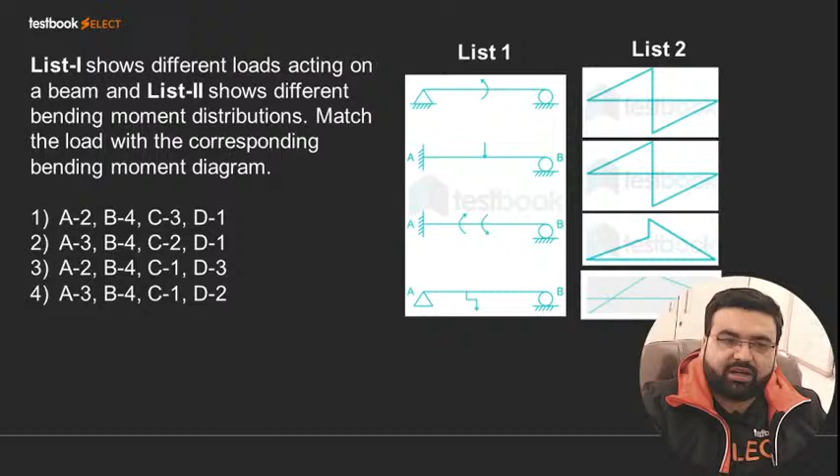Okay, this is a very easy question. You can solve this question. Okay, a simply supported beam of length L or length 2 meters. It is subjected to what? It is subjected to this much.

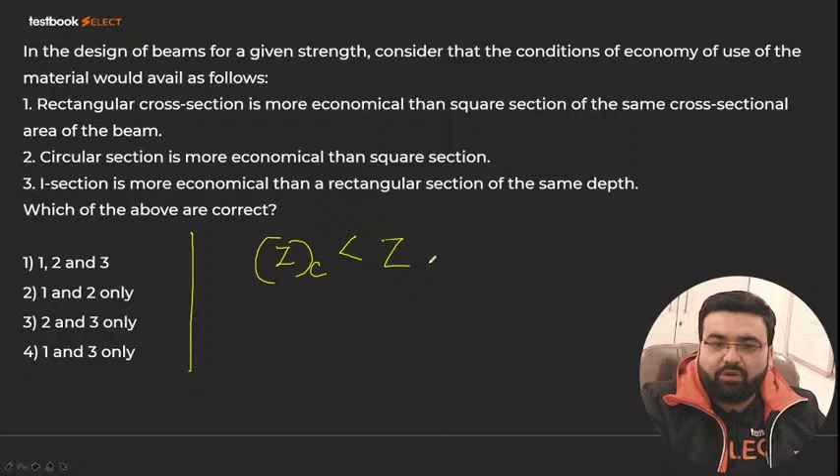So if you remember, I told you one thing when I was teaching you the strength of materials portion, that the section modulus of a circular section comes out to be less than the section modulus of the rectangular section. So from here we get this concept that the rectangular section is more economical than the circular section. So this is result number one that you should remember: a rectangular section is more economical than a circular section. Why? Because the section modulus of the rectangular section comes out to be more than that of the circular section. This is my point number one.

Point number two is that now if you look at the options given, circular section is more economical than square section. So it is completely incorrect because that contradicts what we already know. It means that the correct answer will either be 1 or 3 or both. Now look at the options. In the options we have 1, 2, 3; 1, 2; 2, 3; and 1, 3. But 2 is incorrect, right? So the correct answer will be 1 and 3. That is, option 4 will be the correct answer of this question, and it is an important question, dear students.

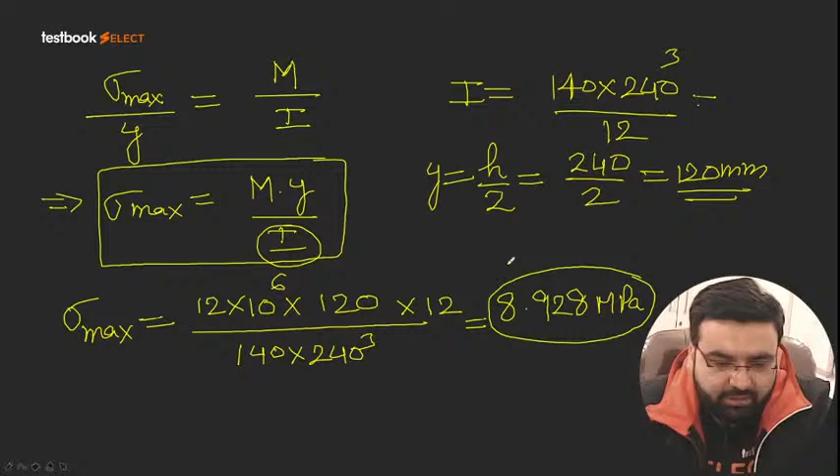8.928, right. The correct answer of this question will be 8.928 megapascals. Why megapascals? Because it was asking me to find the maximum bending stress in megapascals. So that is why I have calculated in megapascals. So very simple. Let us move directly to the next question.

Is it fine, dear students? समझ में आया आपको? Is it fine? आपको समझ में आया? Have you got it, dear students?

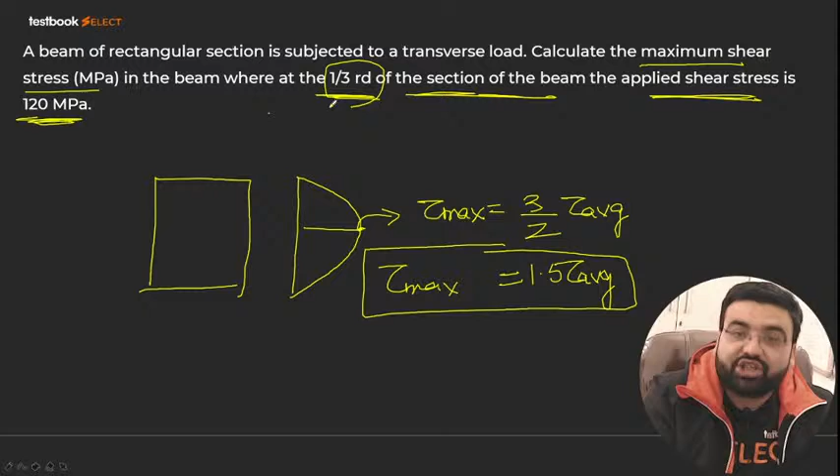और जब हमने solve किया था, the maximum shear stress was coming out to be 3/2 times tau average, or to be more precise, 1.5 times tau average. That is your tau max. Now something is given to you in the question: at 1/3 of the section of the beam the applied shear stress is 120 megapascal. With the help of that we have to find out the answer of this question.

Now to be more precise, to further give you one more hint, we know that the shear stress at any section, for example this rectangular section - if you want to calculate the shear stress at any section, that is equal to V into A into Y bar divided by I of the neutral axis, into B.

That is the formula. Now what is this A? A is the area of the strip which we are taking into consideration.

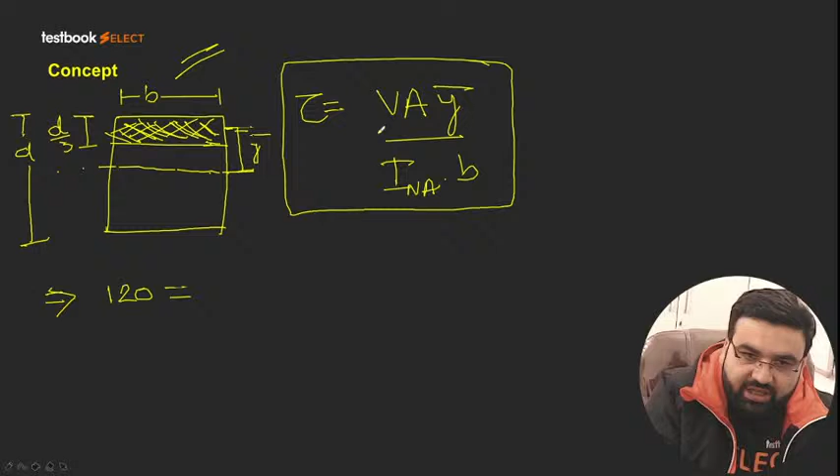So in this, the total shear stress is given as 120 megapascal. So it will be equal to V, the shear force, into area, divided by... Area will be equal to B into D by 3. So B into D by 3 multiplied by Y bar.

What is this Y bar? The distance from this to the center. Now if this is D by 3, this will also be D by 3... okay this is D by 3 and that will be D by 6. So ultimately it will be D by 6 plus D by 6, because D by 3 plus D by 6 will ultimately come out equal to D by 2, right?

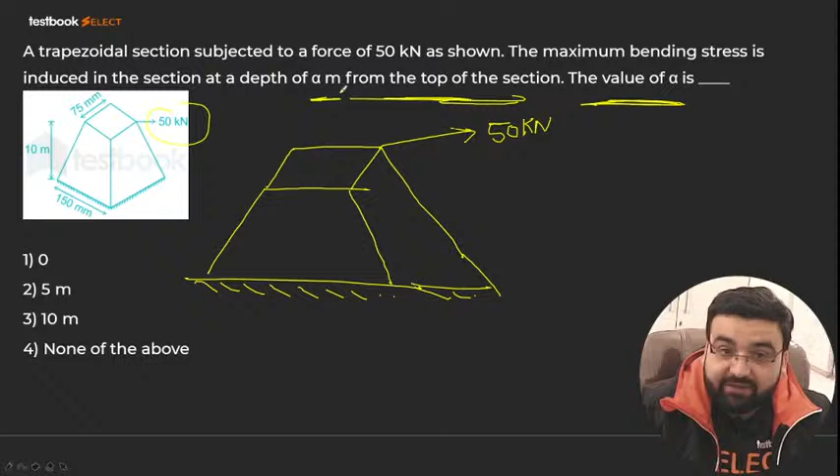So what we have to find is that the maximum bending stress is induced in the section at a depth of alpha meter from the top of the section. What is the value of this alpha?

Try to give the answer to this question. This question is a little bit typical, you'll have to think a bit for this question, but your answer will come. If you think even a little, your answer will come in this.

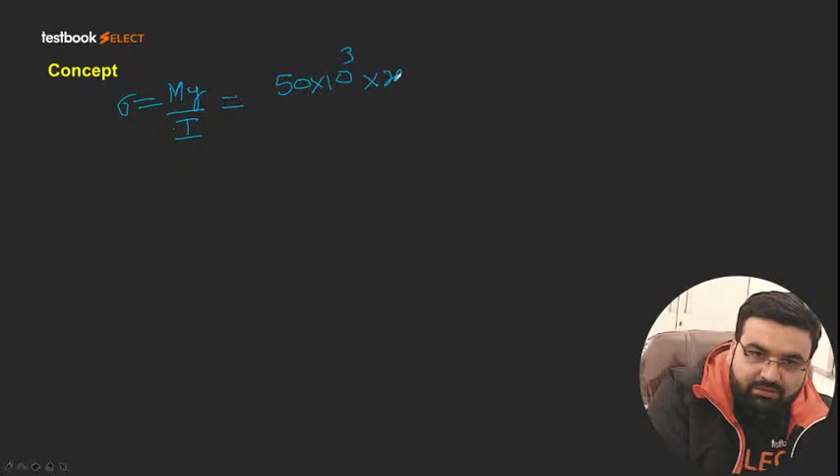And multiplied by y. Now y will be what? Let's see what y is for us. So what will y be for me? The distance from the topmost fiber. So the topmost fiber, how much will it be for me? This will be 7.5. Sorry, this will be 7.5x.

Sorry, this will be 7.5x. This will be 7.5x. 75 plus 7.5x.

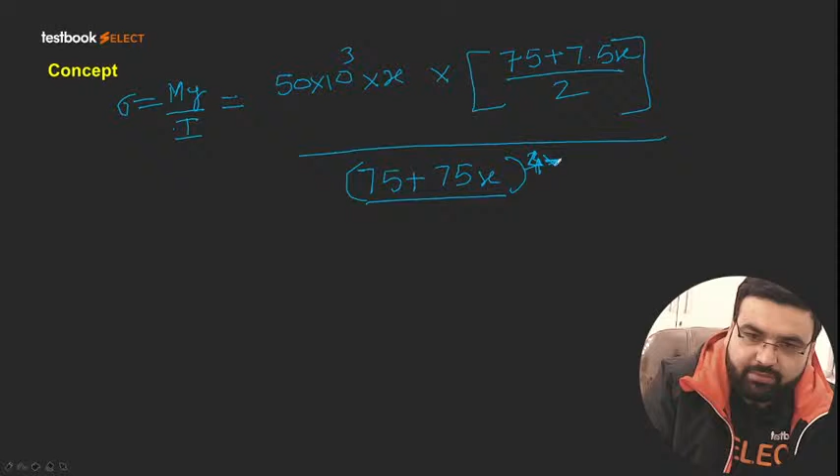ओके, सो ये आपका हो जाएगा 75 plus 7.5x, okay, and divided by what? Divided by 2 and divided by I. Now what is this I? That is your BD cube by 12. Ultimately that is your 75 plus 7.5 into x divided by B and d cube, and it will be 4 ultimately, because b and d are equal, right? Ultimately it will be equal to 4 divided by 12. So if you further solve it, dear students, I am directly writing the answer.

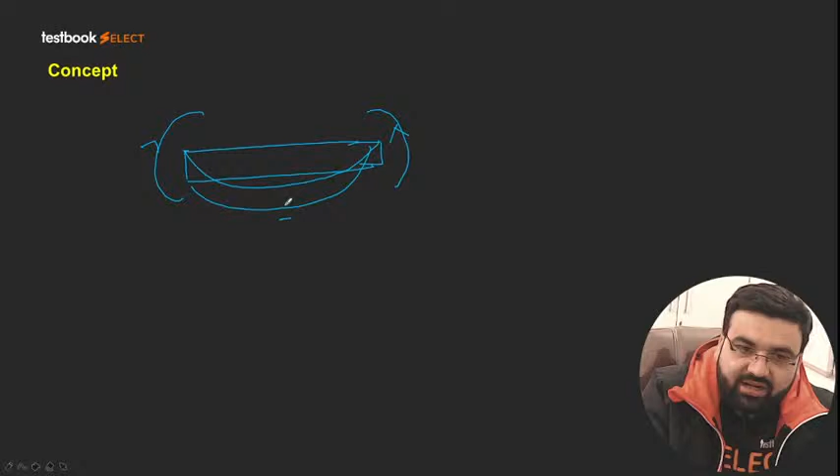Ultimately you will be getting this structure. So here we have tension at the bottom and compression at the top. This structure is called a sagging structure because ये आपका sag में convert हो गया, right? If you have this type of moment acting, ये क्या होगा आपका? Like this. Just wait a second. So here at the top we will have tension, at the bottom we will have compression.

Okay, I'm not feeling well for the past 2-3 days, so that is why I'm coughing a lot.

So T and C. Now the question is, the cross section of a cantilever beam is subjected to an end couple of 40 kilonewton meter. The ratio of the maximum tensile stress to the maximum compressive stress will be what? That is what we have to find.

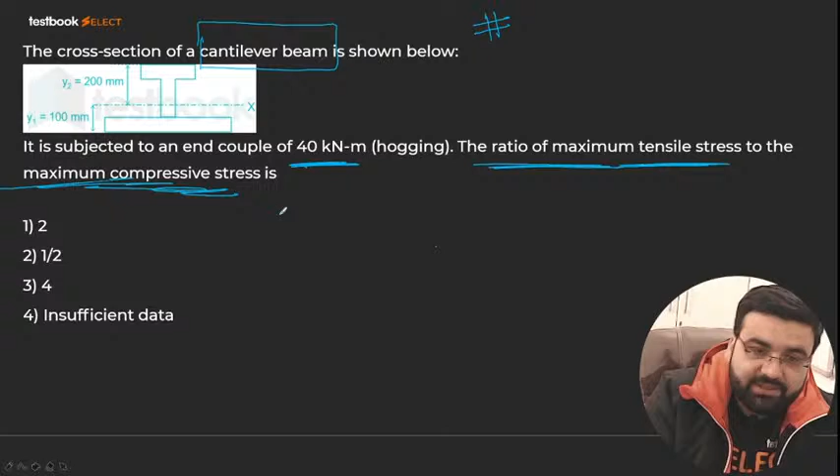Just apply directly the bending stress formula, that is sigma by y equals M by I equals E by R. The geometric property is not needed, so I will not be using this property. I will be only using sigma by y is equal to M by I. Now a hogging moment is acting, so the moment is constant.

If you take the ratio, the moment will get cancelled out. And the value of I will also be the same, because the moment of inertia about the neutral axis is not going to change. Only the value of y is going to change. So I will say sigma compression divided by sigma tension, or let me write like this, because in a hogging moment we have tension at the top.

The question is asking the ratio of maximum tensile stress to compressive stress. So sigma T divided by sigma C will be equal to what? Tension will be here at the top, and at the bottom we will have compression. So what is the distance of the top? That is 2. So 2 is the distance from the top.

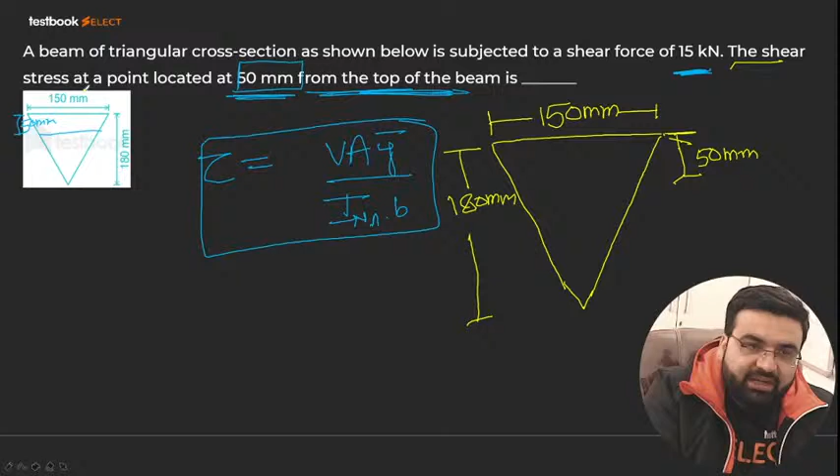The shear stress at a point located at 50 mm from the top of the beam is what? So you have to find the shear stress at this point or at this section. You have to find the shear stress.

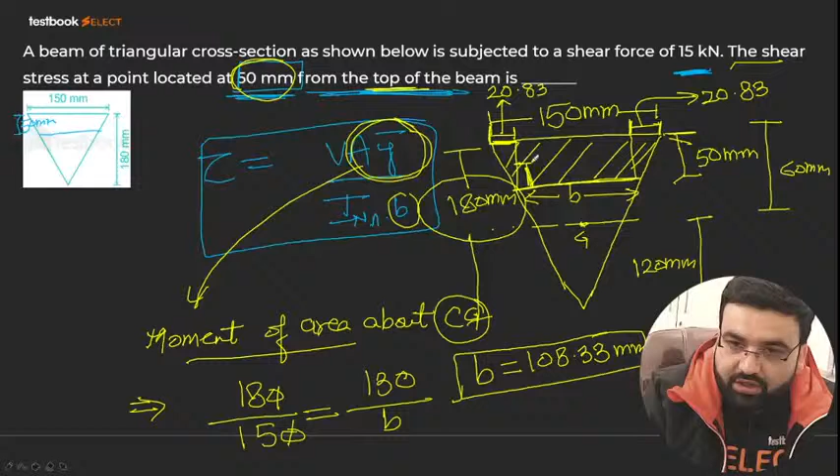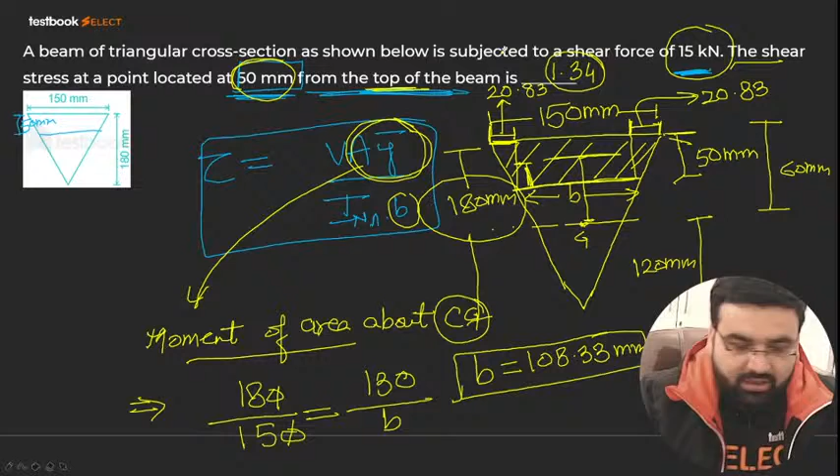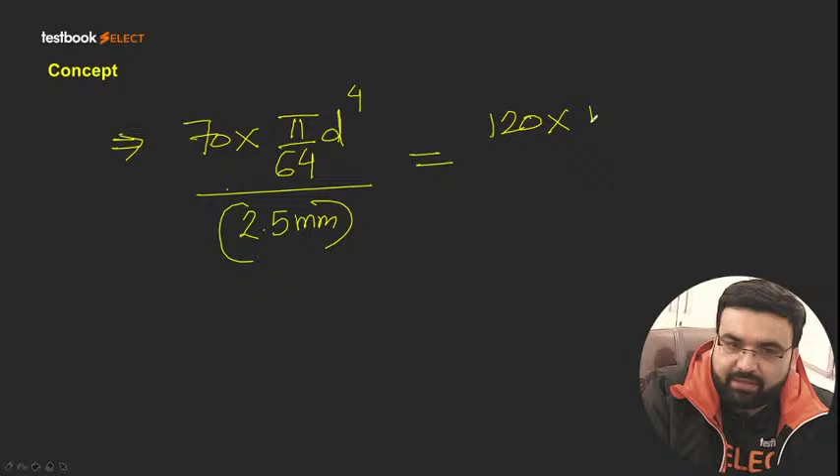120, again multiplied by pi divided by 64 into d copper raised to the power 4. This is your d aluminium raised to the power 4 divided by, now I have to find the radius, right? I have to find the radius of 2 mm. So this is also given as 2 mm. This is my 2 mm.

Now what do I have to find? I have to find what? I have to find it is bent into a circular ring, or if the same ring, the radius of the resulting ring, okay? The radius, okay? And an unspecified pure bending moment is used to bend an aluminium rod of radius 2.5.

Okay, that is the radius of the ring given, okay? So that is your 2 mm that is given here, right? That is your 2 mm given here. So there's a little mistake here, little mistake is here. There is a little mistake here.

So that is your 64 into R that I have to find, and here it was what? It was equal to, so this was equal to, if radius was 2.5 mm, diameter will be equal to 5. So diameter is equal to 5 here. The diameter is equal to 5 here, 5 raised to the power whole 4 divided by 64, and it will be equal to what? 2 mm is the ring. Now this is the final solution. So pi by 64 gets cancelled out from here and here, okay?

And this is what? The diameter of the copper ring is what? The diameter of the copper ring is, radius is 2 mm, so diameter will be 4 mm. So here the diameter is 4 mm. Let me also write down the diameter of this also, that is your 4 mm. So 4 mm is the diameter, 4 raised to power 4, okay? Now that will be the ultimate.

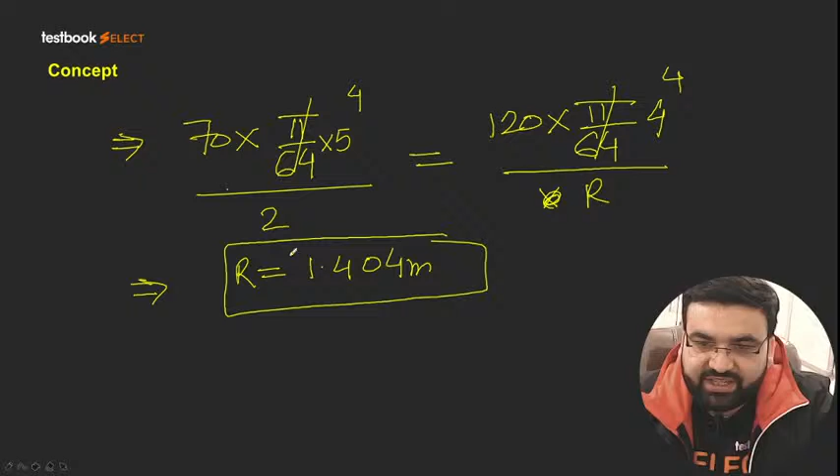So R will be equal to what? R will be equal to, if you solve it, let me try to solve it, R. So R will be equal to 120 into 4 raised to the power 4 divided by 70 and divided by 5 raised to the power 4 and multiplied by 2. It ultimately comes out to be 1.41, nearly 1.41, nearly 1, not even 1.41, 1.40, nearly 1.404 meters, nearly 1.404 meters. That is what it is coming out to be, 1.404. Yes, Dev Singh, 1.404 is the correct answer which we are getting, okay?

1.404. What is the correct option? Option 2 is the correct answer of this question. Very good, everyone, very good, very good.

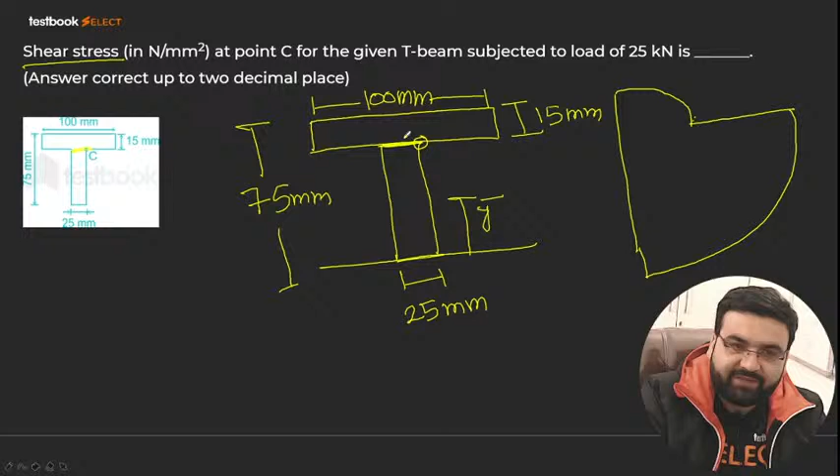25 into y bar will be equal to 25 into 75 minus 15 with 60, 25 into 60 into 30 plus 100 into 15, this will be 7.5, plus 30, plus 60, will be equal to 67.5.

So yes, it will be equal to 67.5. So 100 into 15 into 67.5 plus 100 into 15 into 67.5 divided by the total area.

So ultimately what will your y bar come out to be? It will come out to be nearly, okay this 0 will get cancelled out, and y bar comes out to be 48.75. Y bar is coming out to be 48.75 mm from the bottom. That is your y bar, which is coming out to be 48.75.

Let me also mark the y bar in this figure. So y bar is coming out to be what? It is coming out to be 48.75 mm. This y bar value has come out to be 48.75.

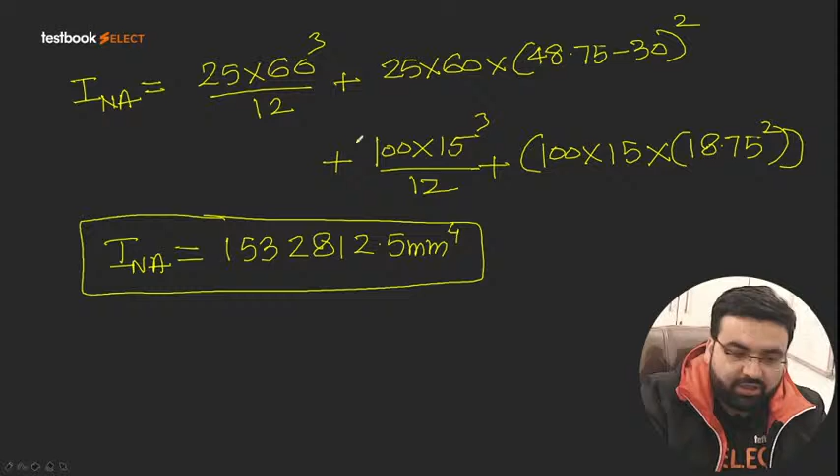Now what is this B here? What is B at this portion? 25 mm is the B at this portion because ultimately I need to find the maximum.

Into 25. If you solve it, dear students, your answer will be: 25 into 15 into 18.75, with zeros cancelling out, into 10 to the power 6, divided by 153.28, divided by 25. Dear students, my answer is coming out to be 18.35 Newton per mm square. That is the shear stress at this section.

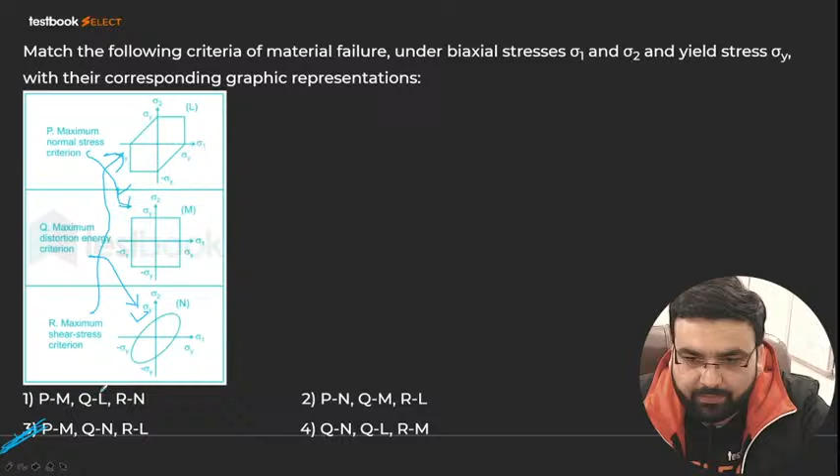Yes, very good. Then we have the maximum shear stress theory. Some rhombus type of thing is formed here, right? R is L. That is also correct. Yes, C is the correct answer, or 3 is the correct answer of this particular question. Very good, Samir. Very good. Next question.

Now what is the maximum shear stress theory? That a material fails in shear with a combination of one or more principal stresses, right?

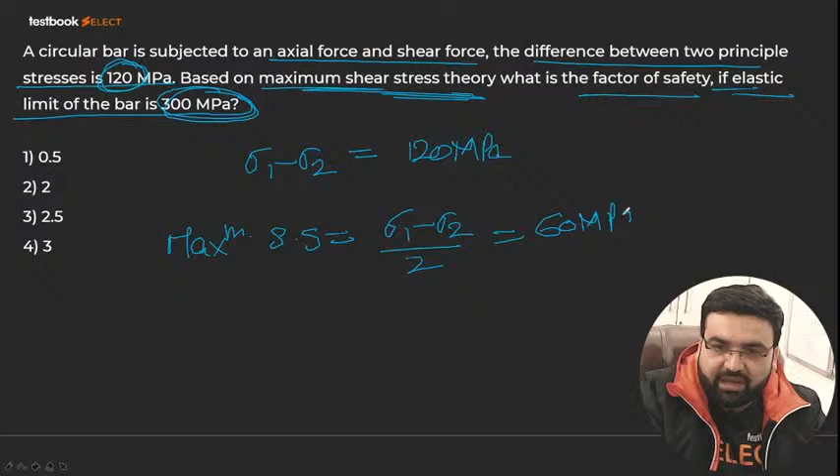So maximum shear stress kitna aa jayega aapke paas? Maximum shear stress will be equal to sigma 1 minus sigma 2 divided by 2, that will be equal to 120 divided by 2, that will be equal to 60 megapascals. So 60 megapascal is the maximum shear stress. Let me change marker. 60 megapascals, right? Okay. Now allowable shear stress is what?

The allowable shear stress is what? That will be equal to 300 divided by 2, because that is sigma y divided by 2, right? 300 divided by 2 will be equal to 150. That is the allowable. So what is the factor of safety now? Factor of safety is equal to allowable divided by actually happening. That is 150 divided by 60. 6 into 2 is 12 and 6 into 5 is 30. That is 2.5. So C will be the correct answer of this question.

Yes, very good, Samir. Very good. Yes, option 3. Very good. C is the correct answer.

Next question. The yield of steel in both tension and compression is 250 megapascal and Poisson ratio is 0.25. It is subjected to principal stresses of 120 megapascal tensile, 60 megapascal tensile and 30 megapascal compressive. The factor of safety according to the maximum strain energy theory is what? Try to give me the answer of this question.

Now, first of all, what is the maximum strain energy theory, right? You must be knowing that sigma 1 square plus sigma 2 square plus sigma 3 square minus 2 mu times (sigma 1 sigma 2 plus sigma 2 sigma 3 plus sigma 1 sigma 3) should always be less than or equal to (sigma y divided by the factor of safety) whole square. That is what the maximum strain energy theory is all about.

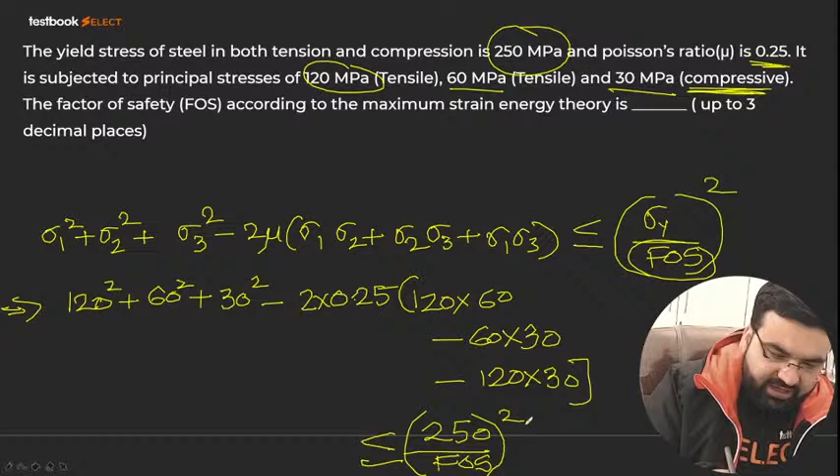So if you calculate it, it will ultimately come out to be nearly 18,000. So 18,000 should be less than or equal to 250 divided by the factor of safety, whole square.

So what will be the factor of safety now? Because we have to get an exact value, let us take it equal. It will be 62500 divided by 18,000, and taking a root of that will ultimately come out to be 1.86, equal to 1.863.

So this is the correct answer of this question, dear students. 1.863 is the correct answer of this question. Yes, Samir, yes, 1.86. Rahul is saying 1.85.

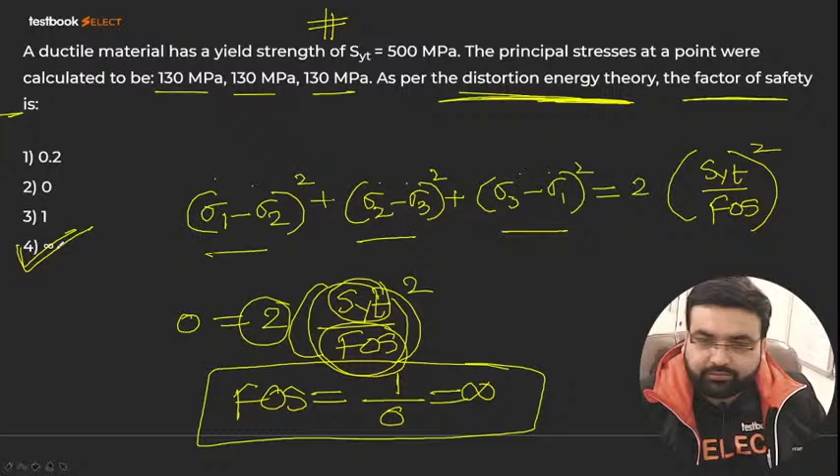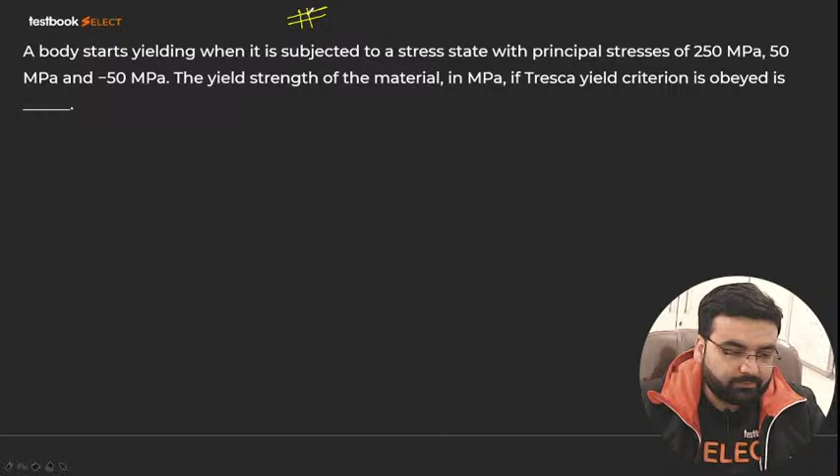According to Tresca yield criteria, we must have SYT divided by 2 times the factor of safety. Remember this was the Tresca criteria. It should be equal to, now here 250, 50 minus 50.

So we have 3 dimensions given, sigma 1, sigma 2, sigma 3. It should be taken as maximum of sigma 1 minus sigma 2 divided by 2, sigma 2 minus sigma 3 divided by 2, and sigma 3 minus sigma 1 divided by 2. So maximum of these 3.

So what is this? My SYT, that is what I have to calculate. This is my sigma 1, this is my sigma 2, and this is my sigma 3. So with the help of this I can find the maximum value, right?

Sigma 1 minus sigma 2, that is 100 divided by 2 equals 50. Sigma 2 minus sigma 3. Samir is getting 300. Very good, Samir, that is a perfectly fine answer. Perfect answer, Samir, 300.

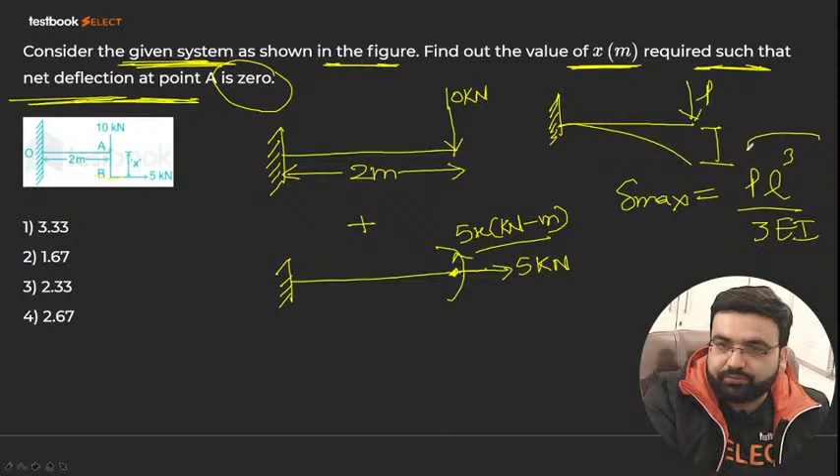From the moment area diagram you can get the deflection. But this thing we already know, PL cube upon 3EI. For example, if we have a cantilever beam like this and you are applying some load P here, the maximum deflection del max comes out to PL cube upon 3EI - that is PL cube divided by 3 times E into I. That you already know.

So we can directly calculate PL cube upon 3EI, that is 10 into 10 raised to the power 3 Newton into L cube. Now what is this L? 2. So 2 cube divided by 3 times of EI. Is EI given to me? No, EI is not given to me. Even if EI is not given, it is a constant and ultimately I can cancel it out, right?

Minus the deflection due to a moment. If you have a cantilever beam like this and some moment is applied, the deflection is given by ml square upon 2EI. That you must be knowing - it is given by ml square upon 2EI.

That will be equal to minus 5 into 10 raised to the power 3 into x into L square. Now what is this L square? L square is 4 divided by 2 EI divided by 2. Okay, it will be equal to 0. If you solve it further, 10 raised to power 3, 8, and it will be equal to 2. It will be equal to 2. 10 into 2 is 20 divided by 3.

20 divided by 3 is equal to 5x divided by 2. So 5x divided by 2 is equal to 20 divided by 3, that is 6.67. Now what will be the value of this x? X will be equal to 6.67 into 2 divided by 5. So 6 into 2 is 12, which comes out to be 13 point something. That will nearly come out to be 2.67 meter. The value of x will come out to be nearly 2.67 meter.

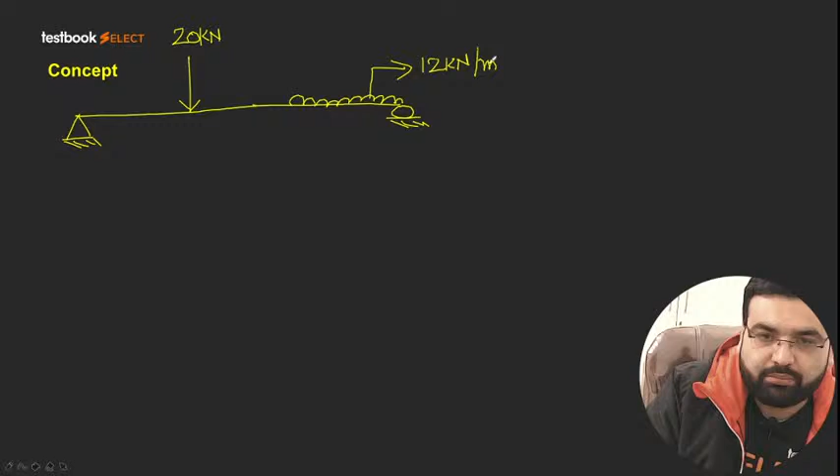This is the beam given to us. Here we have this 20 kilonewton load, and then we have this UDL here. The intensity of this UDL is 12 kilonewton per meter. This span is 3 meters, this is also 3 meters, and this is 4 meters. Now first of all, let us calculate the value of RA and RB.

So RA plus RB will be equal to 20 plus 12 into 4, so 48 plus 20 is equal to 68. Taking the moment about B equal to 0: RA into 10 minus 20 into 7 minus 12 into 4 into 2 is equal to 0. So RA will be equal to 140 plus 48 into 2 is 96. 140 plus 96 will be nearly, divided by 10, will be nearly 236 divided by 10, which is 23.6.

That will come out to be 23.6 kilonewton. That is my RA. If you put your RA in this equation, you'll be getting the RB. RB will be equal to 68 minus 23.6. It will ultimately come out to be RB equal to 44.4 kilonewton.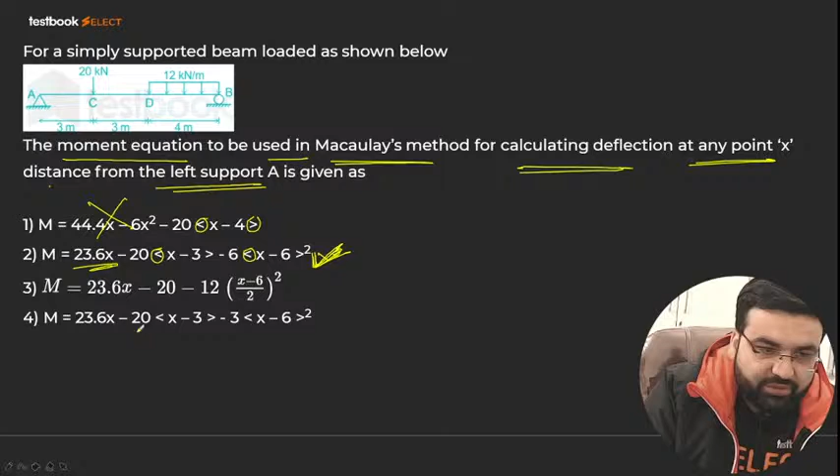Yes, this is the correct answer, dear students. This is the correct answer of this question. 23.6x minus 20 times of (x minus 3) and minus 3, no this is also not correct. So option 2 will be the correct answer.

Dear students, this thing and this thing, it is some typographical mistake there. These are the brackets actually. Please don't mind now. So this thing and this thing, these are the brackets actually. This is like this, okay, these are the brackets, dear students. Please don't mind now.

Okay, so that was the answer of this question, dear students. So have you got it? Have you got it? Shall we proceed further?

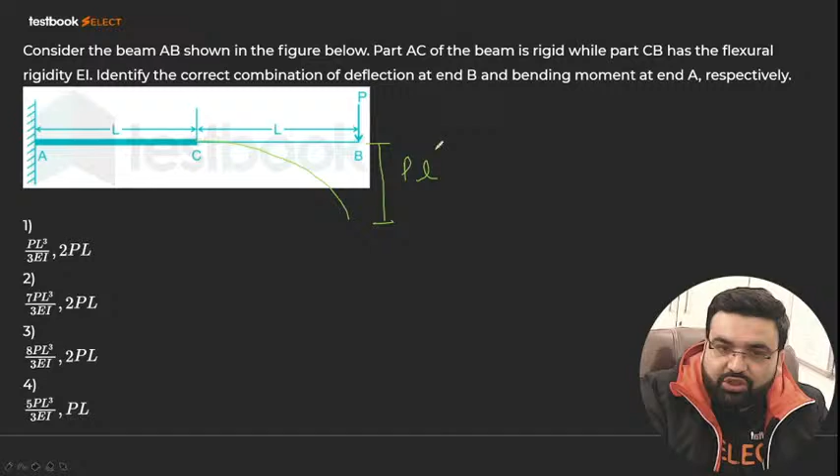So deflection will come from this. So we have the deflection from this, like this. Now it means that this will behave as a support because it's a rigid thing. Deflection, that is your PL cube divided by 3EI. This L will be what? This is the L.

The moment acting at this point will be equal to what? P into L plus L, that will be equal to 2PL. So 2PL will be the moment acting at this point and the deflection will be PL cube upon 3EI. So 1 is the correct answer, dear students.

Next one. Now this question you can solve. I'm not going to solve this question. Apart from it, let us move to the next chapter directly because otherwise we will not have sufficient time left. Yeah, theory of columns, right? That is my 7th chapter.

Question number 1 in theory of columns. Consider two axially loaded columns as shown below. The ratio of the buckling load in the column AB to that of the column CD is what? So one is hinged somewhere here. The column number 2, it is supported from here also as well as supported from here also.

Dear students, if you have a column which has been supported from here and from here, ultimately this particular support will behave as a rigid support, because this column will not be able to move in this direction as well as in this direction. So that is a very important concept, by the way.

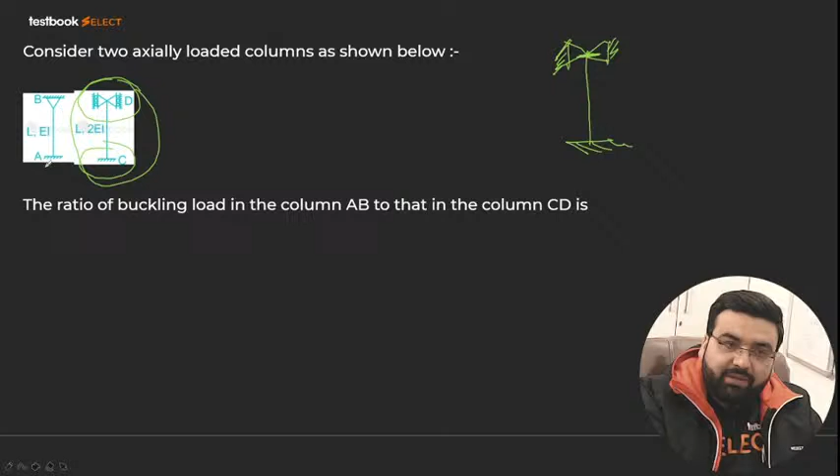So this column will be fixed from both the ends, while the other behaves as fixed at one end and hinged at the other. So the ratio of the buckling load in column AB to that of CD will be equal to what? Nothing is left in this question. Who will give me the answer now?

We know that the buckling load is given by pi square EI divided by L effective whole square. When one end is fixed and the other is hinged, L effective is L divided by root 2. When both ends are fixed, L effective is L divided by 2.

For column AB, it will be equal to 2 pi square EI divided by L square. For column CD, read this question very carefully: here we have 2EI. Divided by L by 2 whole square, it will be 2 into 4, that is 8 pi square EI divided by L square.

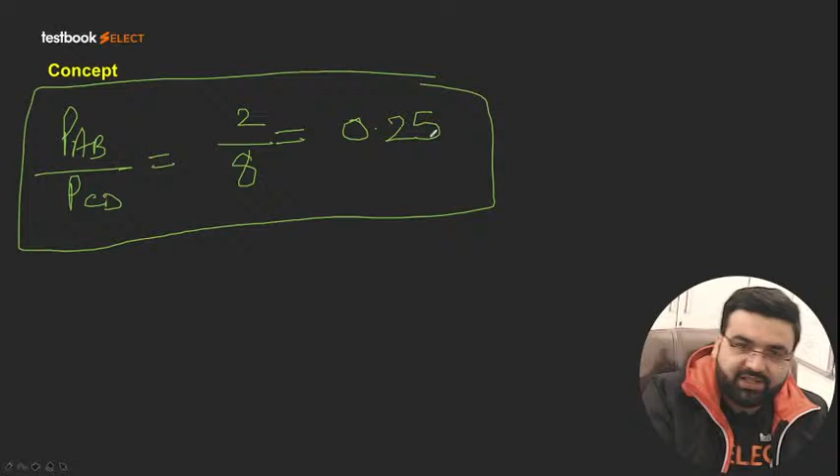So P AB, the buckling load of AB, divided by the buckling load of CD will be equal to 2 divided by 8 directly. So 0.25 will be the correct answer of this question. Who has got the answer as 0.25? Yes, 1 by 4 will be the correct answer.

Alisha, it should have been 1 by 2, but it is given as 2EI. So that is why 1 by 4, that is 0.25, will be the correct answer. If it was not given 2EI, obviously that was the correct answer. Very good. Is it fine, dear students?

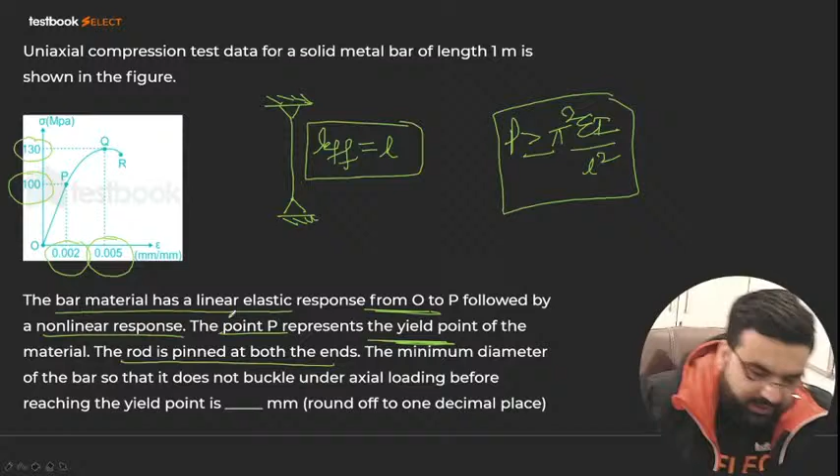So let me change the color of the marker. Let me take it as yellow. Now we know that the buckling load is given by pi square EI divided by L effective whole square. But here, L effective will become equal to L. Do I know the value of E? No. Do I know the value of I? No. Do I know the value of L? Yes. Apart from it, I do not know anything.

E will be equal to what? E comes out from the stress versus strain curve, right? So stress is equal to 100 and strain is 0.002. That is 100 divided by 0.002. It will come out to be nearly 0.5 into 10 raised to the power.

This was megapascals. Let me multiply it with 10 raised to power 6 also, so that it becomes pascals. So we have 11. So 0.5 into 10 raised to power 11 pascals will be the answer for this.

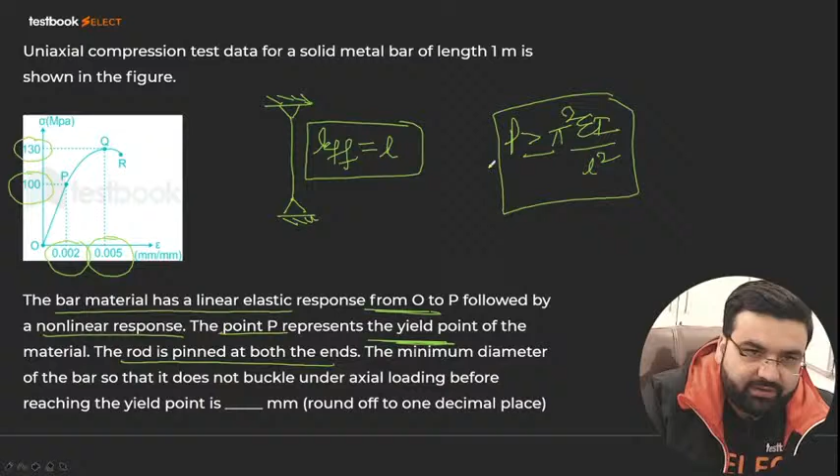Now let me apply Euler's formula. I will be getting 10 raised to the power 8 multiplied by pi by 4 into d square. It should be equal to pi square EI, that is pi square into E, 0.5 into 10 raised to the power 11 pascals, into I, which is pi by 64 into d raised to the power 4, divided by L square. L is given as 1 meter.

Now if you solve it, d square gets cancelled out, and it will ultimately come out to be d square here. So from pi by 4 and pi by 64, it will be 16 here. So 16 will be at the top, divided by pi square into 10 raised to the power 3 and into 0.5. That is what it ultimately will be.

And d will be equal to what? In meters, it will come out to be the root of 16 divided by pi square, divided by 1000 and divided by 0.5, and taking a root of it, it comes out to be 0.0569 meter, or to be more precise, 56.9 mm. So the diameter is coming out to be 56.9 mm.

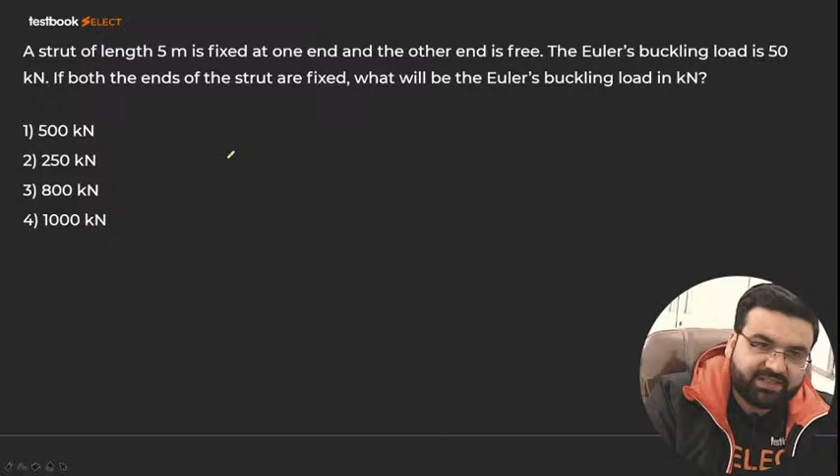A strut of length 5 meters is fixed at one end and the other end is free. In this case, the Euler's buckling load was 50. Now, if both the ends are fixed, what will happen? In the fixed-free case, the buckling load is one-fourth of the hinged case, and in the fixed-fixed case it is 4 times the hinged case. So the total difference will be 16 times.

So the Euler's buckling load in this case will become 16 times of 50. 16 into 5 is 80, so 800 kilonewton will be the correct answer of this question. So without even calculating it, you can say that 800, that is C, is the correct answer. Yes, very good. Next question.

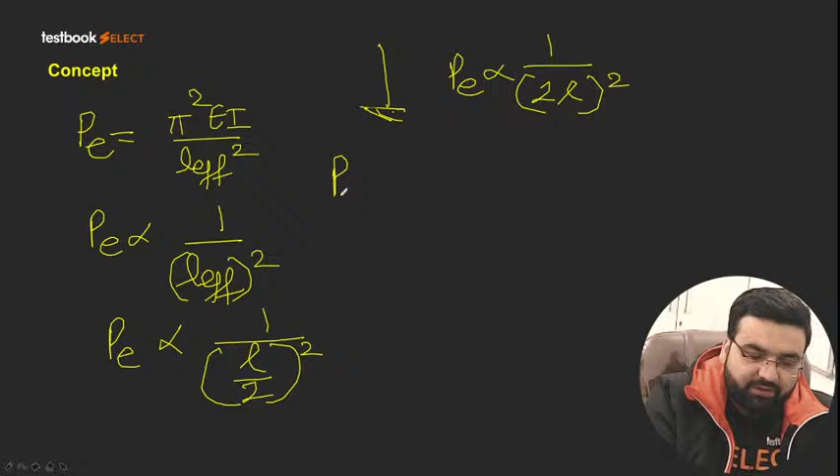Now if you divide it, ultimately you will be getting 1 by 16. So P2 upon P1 will be equal to 1 by 16. Now P1 minus P2 divided by P1 into 100, or the mod of P2 minus P1, will be equal to 15 divided by 16 into 100.

Now what is 15 divided by 16 into 100? It will come out to be 93.75. So 93.75% will be the correct answer of this question.

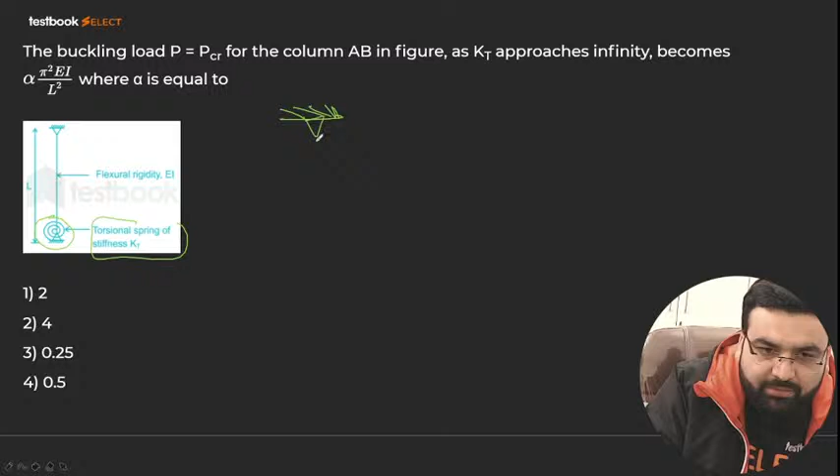So what will happen if one end is fixed and the other end is hinged? The L effective becomes equal to L by root 2. If you square it in the denominator, in the numerator it will come out to be 2, right? So 2 will be the answer, that is option 1 will be the correct answer. Yes, correct. Image is not visible clearly, okay, that might be one of the cases. But 1 is the correct answer of this question.

Okay, let's leave this question. This is also an easy question, you can solve it. Euler's theory, crippling load, you can solve this question also. It is a theoretical question. Hollow cylindrical cast, also you can solve; hollow is also very easy, almost similar. The strut of 3 meter length and 4 centimeter in diameter, one end is fixed and the other end is hinged. You can solve this question also. Now let us move to the next chapter.

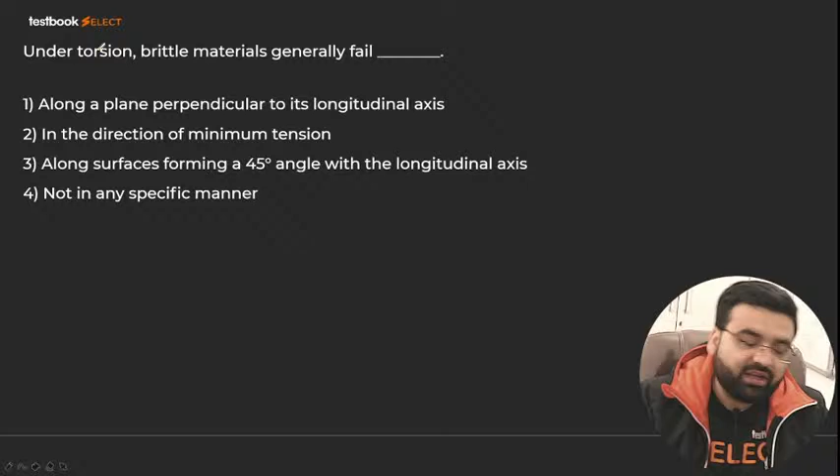When subjected to torsion, a brittle material will break along a surface which is at an angle of 45 degrees to the shaft axis. A ductile material will fail at a plane perpendicular to the shaft axis, because a ductile material generally fails in shear. That is the difference between the two, so remember this. So option number 3 is the correct answer of this question.

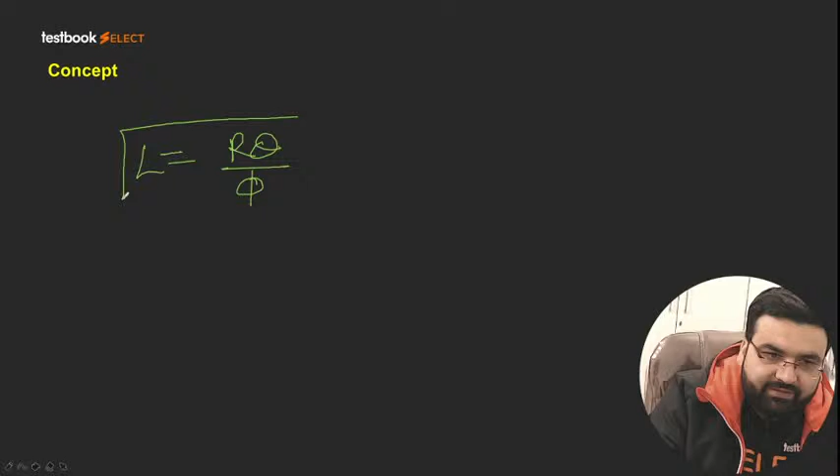So what will this be? It will be equal to 100 into theta, and since theta is very small, I can take it directly in radian or degree, whatever it is. It will be equal to 0.5 divided by 0.1, since the angle of twist is given as 0.5 and the shear angle is given as 0.1. So it will be equal to 500 mm, which will be the length of the shaft.

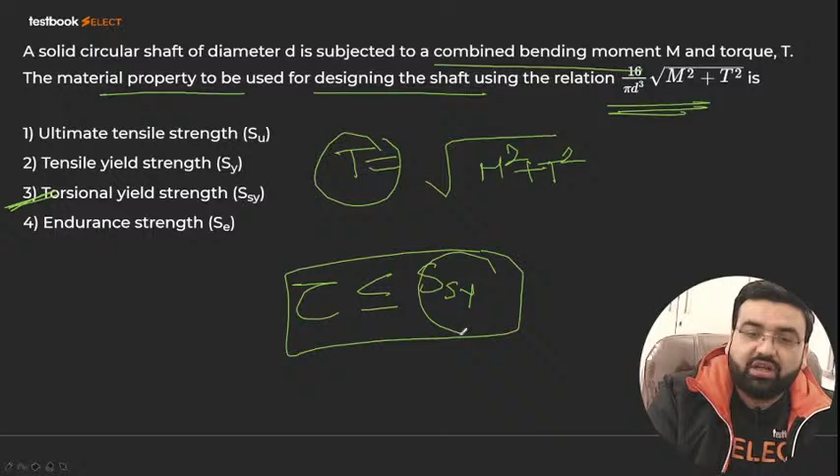So if the combined torsion is given by under root of m square plus t square, that is the combined torsion. And due to torsion, shear stresses are generated, right? So shear stress should always be less than or equal to what? SSY, that is the torsional shear stress or the torsional yield strength. It should always be less than or equal to torsional yield strength. So 3 will be the correct answer of this question.

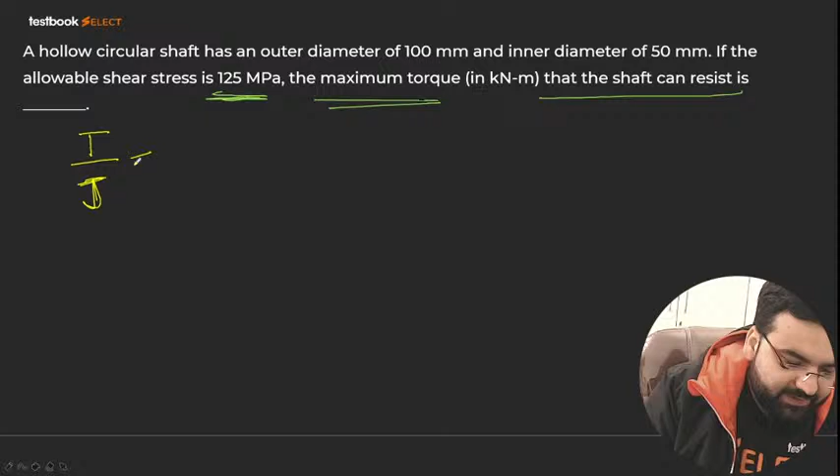Now let us try to solve the question also. Let me take a yellow pen here. So we know that from the torsional formula, same as we have the flexural formula, we have the torsional formula, that is torque divided by the polar moment of inertia, T by J, is equal to tau divided by R, is equal to G theta by L. So in this question, what else is required?

Is polar moment of inertia required? Yes, it will be required. Is this required or not? It will not be required. Only tau by R, this thing is required.

So now tau max is given to us as what? The tau max is given to us as 125 megapascals. So let me put 125 here. So it will be equal to 125 divided by the radius of the shaft. Now how much is the radius of the shaft?

Now without even doing this thing, let me calculate the polar moment of inertia. The polar moment of inertia will be equal to pi by 32, and since it is a hollow shaft, outer diameter whole 4 minus inner diameter whole 4. So that will be equal to, outer is 100, inner is 50. So 100 raised to the power 4 minus 50 raised to the power 4, that will be the polar moment of inertia.

Clear? Now what will be this torque, the maximum torque? Maximum torque will be equal to tau into J, that is 125 into J. Now what is this J? J is pi by 32 into 100 raised to the power 4 minus 50 raised to the power 4, divided by R. Now what is the value of this R?

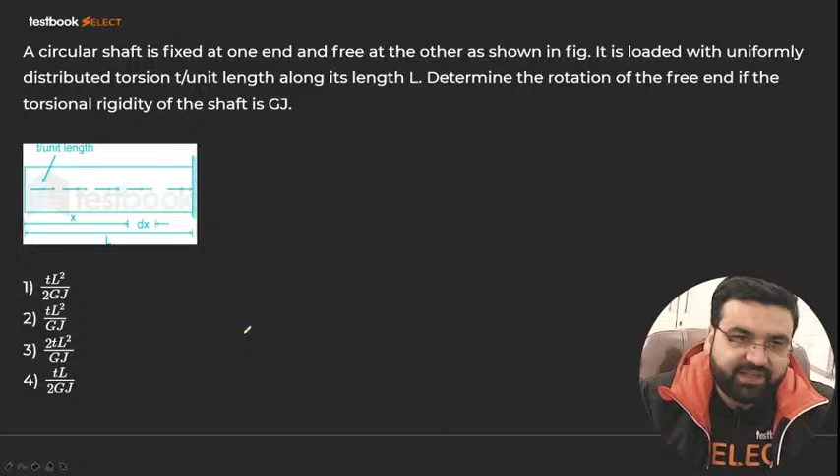This question. A circular shaft is fixed at one end. Here it is fixed, right? If you are not able to see it, let me again draw it. So this is the circular shaft which is fixed here, like this. At the free end as shown in the figure, it is rotated with the uniformly distributed torsion T per unit length along its length.

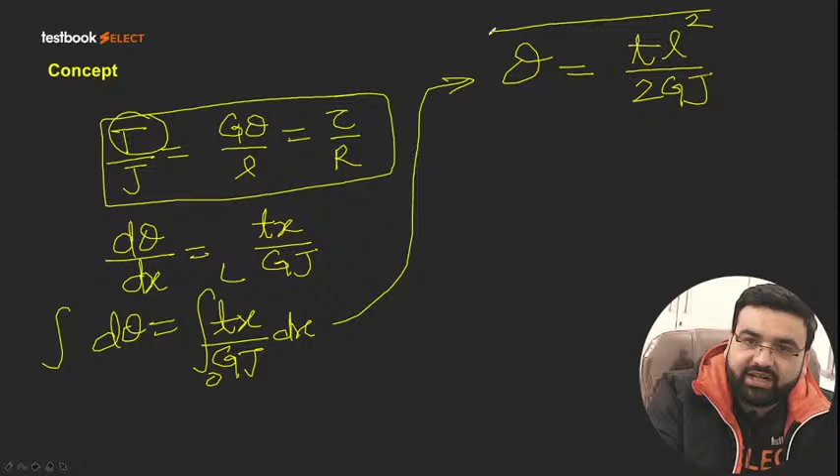Doing the integration for the whole length of the shaft, the total theta will come out to be t into x square divided by 2. Putting the upper limit as L, it will be equal to TL square divided by 2 times G into J. So TL square divided by 2GJ. Yes, you people are correct. So 1 is the correct answer of this question. Very good, everybody.

Yes. Next question. Try to solve this question.

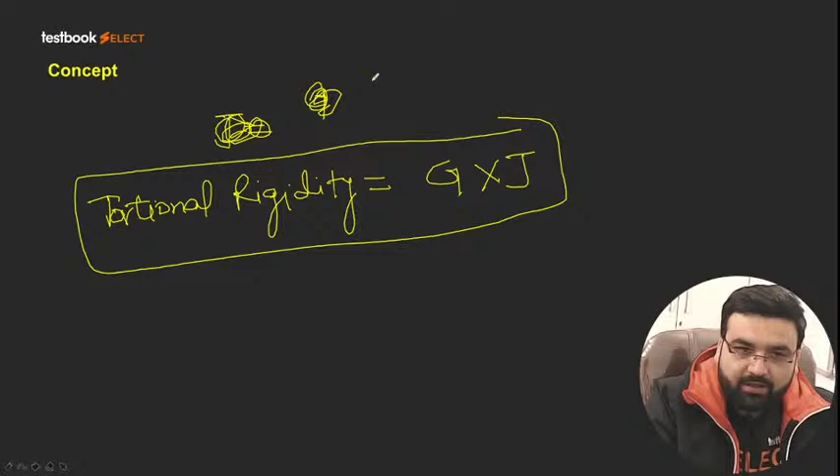It will be equal to G into the polar moment of inertia of the second shaft divided by G into the polar moment of inertia of the first shaft, because it is the same material, so we have the same modulus of rigidity. G gets cancelled out, so it will be IP2 upon IP1 only. In terms of radius, the polar moment of inertia is given by pi by 2, so it is pi by 2 (R4^4 minus R3^4) divided by pi by 2 (R2^4 minus R1^4).

Or you can say that J2 upon J1 will be equal to, pi by 2 gets cancelled out, R4^4 minus R3^4 divided by R2^4 minus R1^4. That is what it will be. Now something else is given here. Now what else is given?

Two hollow bars are made of the same material, concentric circles as shown in the figure. It is given that R3 is greater than R1, R4 greater than R2, and that the areas of the cross section are the same. Now dear students, if the area of cross section is the same, pi into (R2 squared minus R1 squared) will be equal to pi into (R4 squared minus R3 squared).

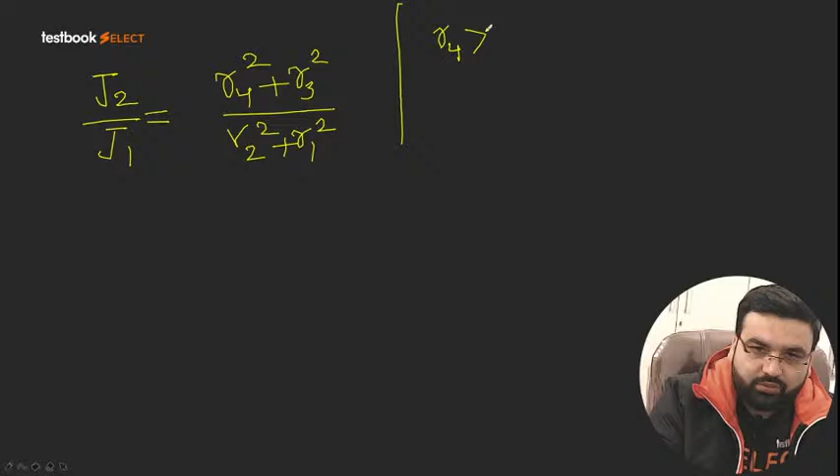That is what ultimately we will be getting. Now something is given in the question: R4 is greater than R2, and R3 is greater than R1. Let me write it here also. R4 is greater than R2 and R3 is greater than R1. So this is given in the question. That is, both numerator terms are greater than the denominator terms, right?

What does it mean? It means that J2 divided by J1, this value will be greater than 1, right? Simple. So that is the correct answer of this question. Alisha is saying A. Let us see. Yes, Alisha, A will be the correct answer. So greater than 1 will be the correct answer of this question. Very good.

That is because this thing is given, right? R4 is greater than R2, R3 is greater than R1. It means that both the numerator terms are greater than denominator terms. Obviously, the ratio will be greater than 1. Simple.

Have you got it, dear students? Is it fine? Option 1. Yes, Samir. It was option number 1. Yes, very good. Have you got it? Is it fine? Shall we proceed now?

Now let us proceed to the next chapter directly, because other questions you can easily solve. A machine element question, an easy question it is, okay? But let us move to the next chapter, otherwise we will not be able to complete all the chapters. That is the thick and thin cylinders and spheres.

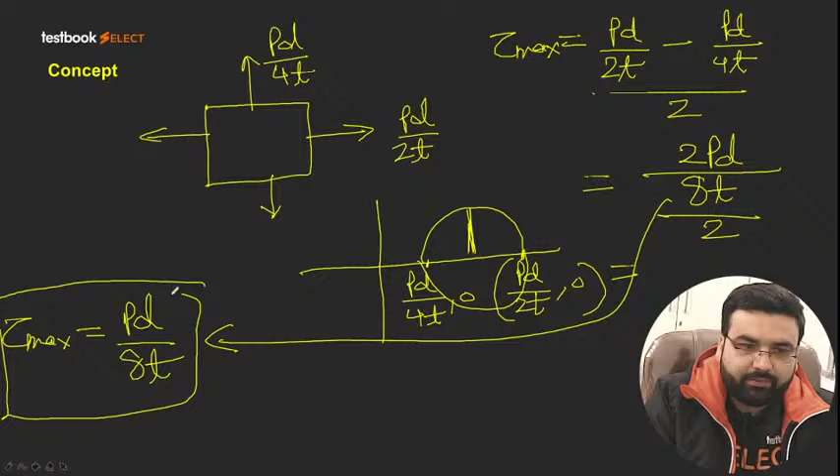Tau max will come out to be PD upon 8T. That is what it will be, PD upon 8T. Okay. Now let us directly try to solve this question. So tau max will be equal to what?

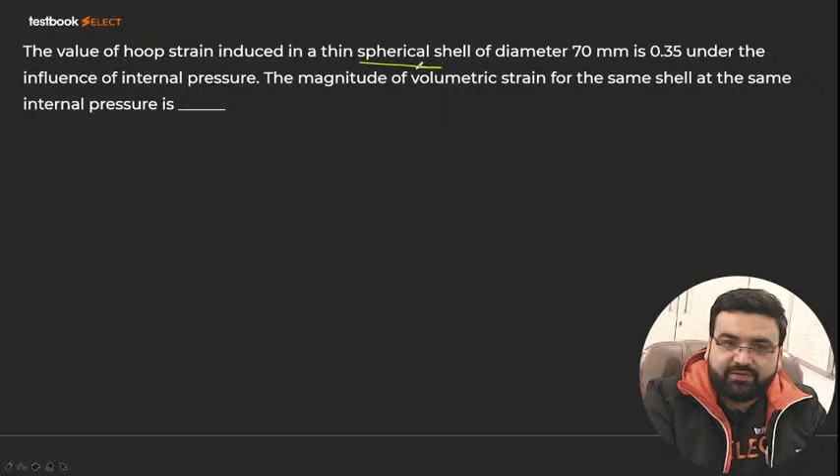Next, this question: the value of hoop strain induced in a thin spherical shell of diameter 70 mm is 0.35 under the influence of internal pressure. The magnitude of volumetric strain for the same shell at the same internal pressure is what? So we know that epsilon V in case of a sphere is equal to 3 times epsilon H. I have given you a hint. In case of a sphere, all the stresses acting in all the directions are equal, so strain will also be equal, and volumetric strain equals epsilon x plus epsilon y plus epsilon z, so it will be 3 times epsilon H.

Epsilon H is given to us as 0.35. Epsilon V will be equal to 3 into 0.35, equal to 1.05. So 1.05 will be the volumetric strain. Now what is it asking me in the question? The magnitude of volumetric strain is, oh, very simple, it is just 1.05. I did not read the question carefully. It is just asking me volumetric strain only. It will be 1.05. No need to worry at all.

Yes, 1.05. Yes, very good, Alisha. 41.67. 1.05. Yes, very good, everyone. Very good.

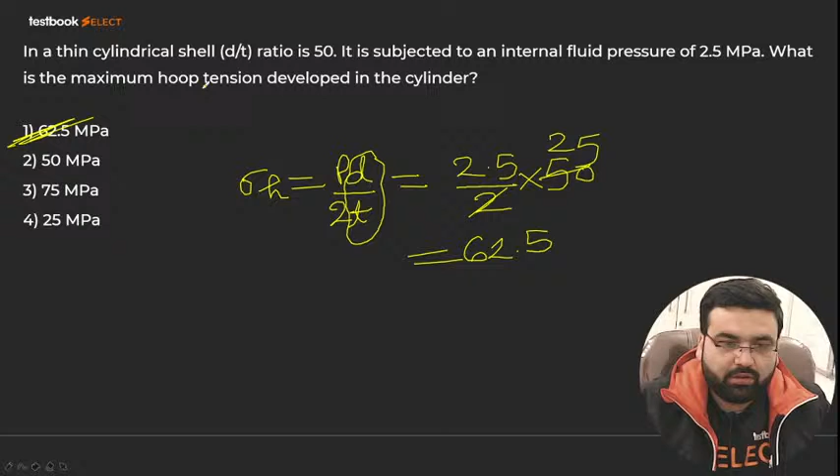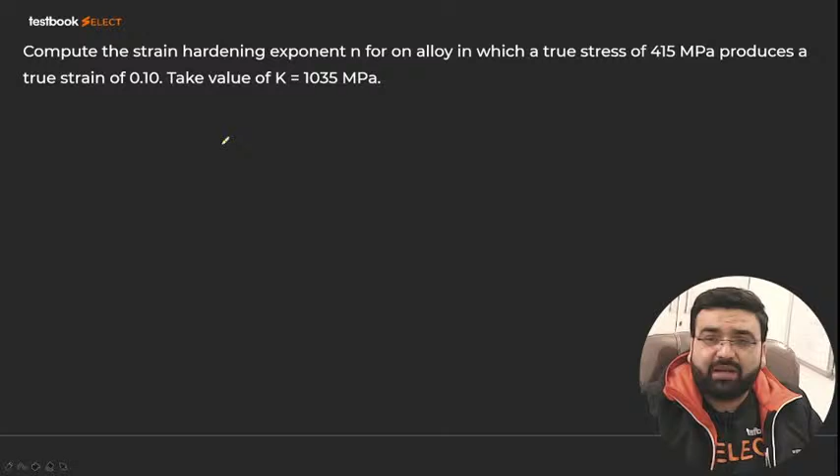Solve question number 1. Compute the strain hardening exponent N for an alloy in which a true stress of 415 megapascal produces a true strain of 0.10. Take the value of K as 1035 megapascal. Who will solve this question? So we have to find the strain hardening exponent. Now the question is, what is the strain hardening exponent?

So first of all, we know that sigma T is given by K into epsilon T raised to the power N. Let me take the logarithm on both sides so that N comes down. Log of sigma T equals log of K plus N log of epsilon T. So N will be equal to log of sigma T minus log of K, divided by log of epsilon T. That is the strain hardening exponent.

The question is, sir, where did this derivation come from? That is a very well-known relation; I have already explained it in my classes. Sigma T equals K into epsilon T raised to the power N in the strain hardening zone. I don't remember the name of the scientist, but remember the formula. So now you can directly put it: N will be equal to log of 415. Why 415? Because it is given, 415 megapascals.

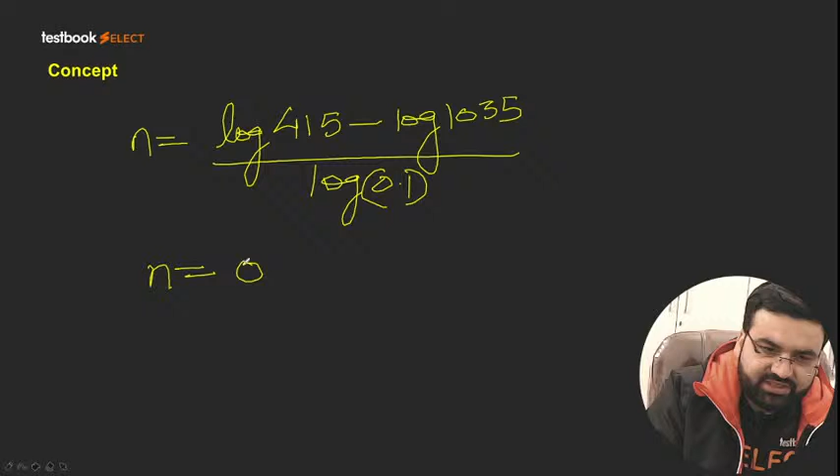Log of 415 minus log of 1035. Why 1035? Because it is given as the value of K is 1035. Log of 1035 divided by, we have this log of epsilon T. Now what is this log of epsilon T? That is log of 0.1, or true strain. Further solve it, N will come out to be 0.397. I am directly writing the answer because I know the answer.

So the answer directly will be equal to 0.397. It will come out to be 0.396 or 0.397 nearly. That will be the correct answer of this question. So the correct answer of this question will be equal to 0.397.

Next question. For some metal alloy, a true stress of 345 megapascal produces a plastic true strain of 0.02. How much will a specimen of this material elongate in mm when a true stress of 415 megapascal is applied if the original length is 500 mm? Assume a value of 0.22 for the strain hardening exponent N. Now who will give me the answer of this question?

Again, let me write the same formula. That is your sigma T will be equal to K into epsilon T raised to the power N. Now, if you take the logarithm on both the sides, you will be getting, and K is a constant, N is the strain hardening exponent, K is a constant. Now, what else is given? 0.22 for strain hardening constant, this N value is given to us as 0.22.

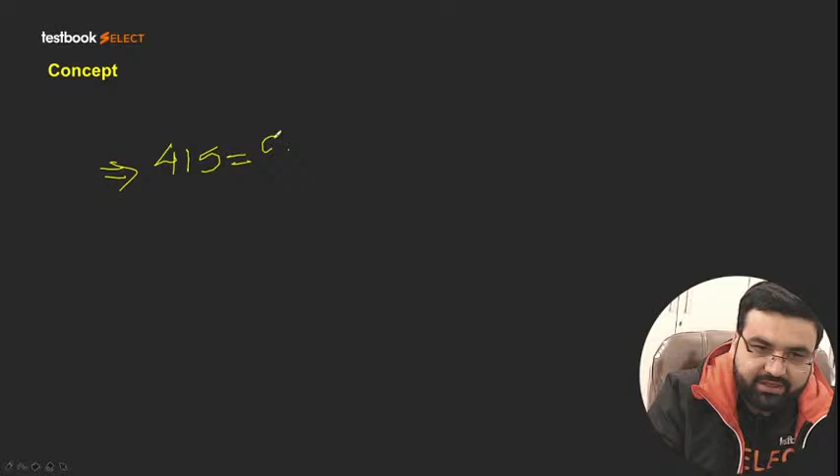You can also divide it, you will get the answer. There is no need to calculate the value of k also. You write down two equations, you divide it, k will ultimately get cancelled out. That is also you can do. So it will be equal to 815.8. But just to make you sure how do we calculate the value of k, I have calculated it, so that is 815.8 multiplied by epsilon t, which I don't know, epsilon t raised to the power 0.22.

The value of epsilon t from here will come out to be nearly 0.046. I'm directly writing the answer because I have the answer sheet with me. I'm directly writing it, 0.046.

Now applying the basic concept of the logarithmic strain, that is my L upon L naught, it is equal to e raised to the power, because ln of L upon L naught is equal to this 0.046. If you take anti-logarithm here, it will come out to be e raised to the power 0.046. Ultimately, you will be getting 1.047 will be the value of L upon L naught, or you can say that L will be equal to 1.047 multiplied by L naught.

Now what is the value of this L naught here? So L naught is already given to us in the question itself. That is 500 mm. So 500 mm is the value of this L naught. Ultimately it will come out to be 523.54, that is the value of L, which is coming out to be 523.54.

Now what will the value of L minus L naught be? The value of L minus L naught will be equal to 523 minus 500, that is your 23.54. Simple, directly I am writing it. 23.54 will be the correct answer of L minus L naught. So 23.54 is the correct answer which I am getting. So the correct answer will be equal to 23.54 mm.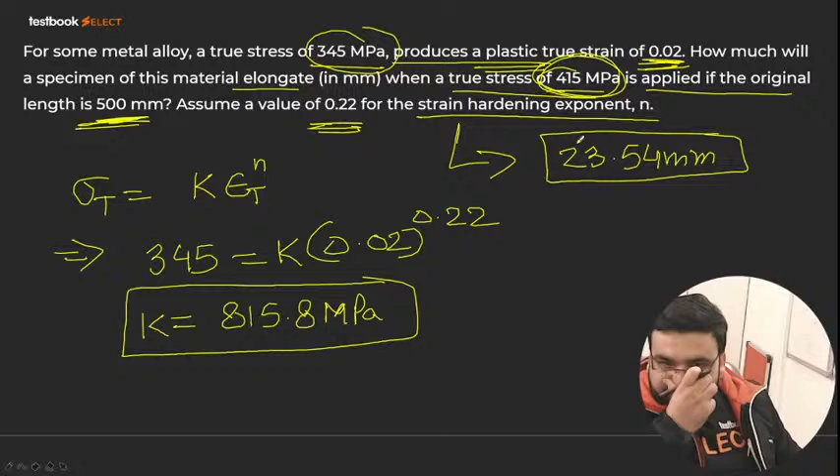I hope you have got it now. Is it fine, dear students? Is it fine? Is it fine? Have you got it?

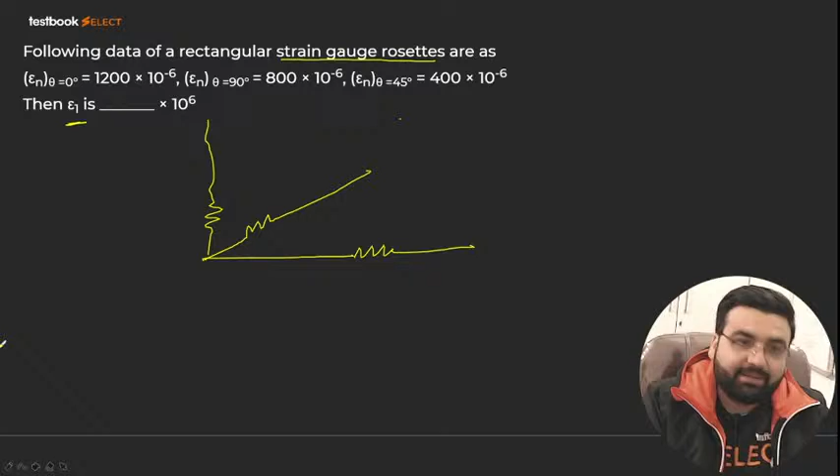Now what we have to do is find epsilon 1. You have to find this epsilon 1 - how much will be its value? Who will give me the answer for epsilon 1?

Again, if you know these rosette questions, they are a little bit lengthy. So remember this: let us say this is your epsilon A, this is your epsilon B, and this is your epsilon C. Rosette questions are a little bit lengthy, but still we will try to solve them. You also try to solve it, I am also trying to solve it.

Now this is what is given. Note down the values, then one by one we will solve these questions. You also solve it, I will also solve it.

23.156 mm - yes, that was correct, almost correct.

You also try to solve it, dear students. I am also trying to solve it. We both will solve it together, because rosette questions are a little bit lengthy, but not very difficult - just lengthy.

Now let us try to solve it. First of all, epsilon n theta is given to us - at 0 degree it is given as epsilon A. So I have written here epsilon A, that is your epsilon at 0 degree. This is my epsilon at 45 degree, and this is my epsilon at 90 degree. So these are the values I have given: epsilon A, epsilon B, and epsilon C.

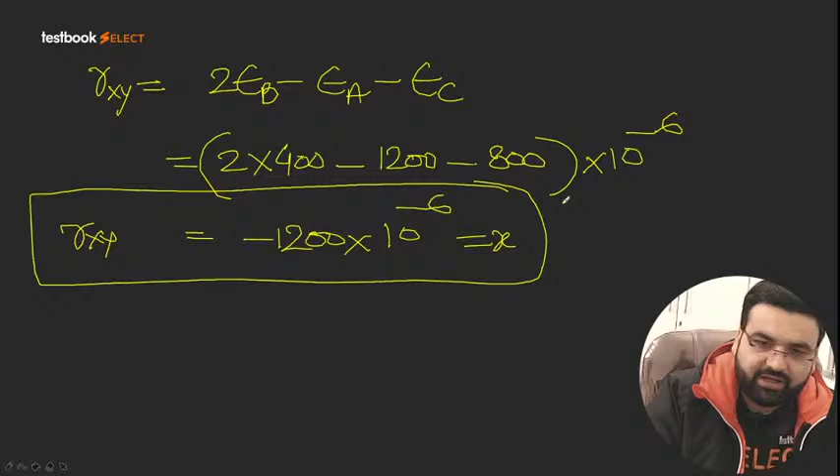Gamma xy is coming out equal to x. So in the previous equation, I have to put it as minus 1200 divided by 2. Simple, now it is simple, right? So let me put it here directly. It will be equal to 1200, 800, 2000 divided by 2 is 1000. Directly it is 1000.

And 10 raised to power 6 -- obviously we will have 10 raised to power minus 6 also here, and here also, everywhere we will have 10 raised to power minus 6. If you solve it, ultimately you will be getting...

1632.45 into 10 raised to the power minus 6. That is what my epsilon 1 will come out to be. That is the value of epsilon 1.

Samir, 2.216 -- it is 1632.45. Please check where you have done the calculation mistake. Please check it, please check it. Where have you done the calculation mistake? You will come to know.

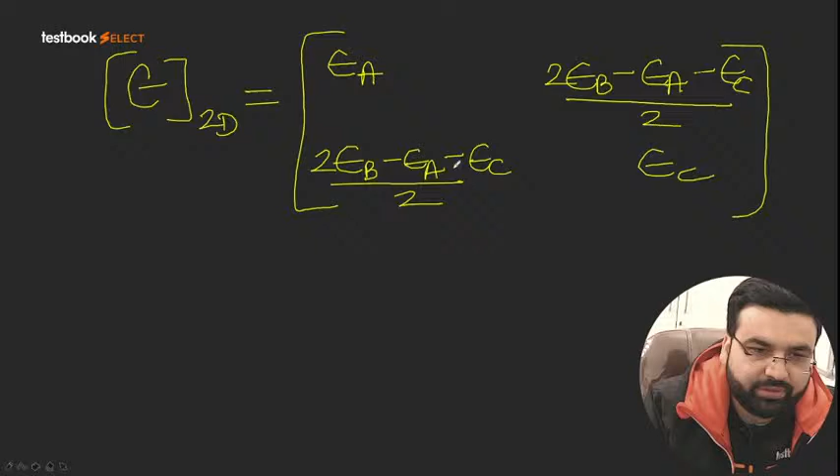Please check where you have done the calculation mistake, because mine is coming out to be nearly 1632.45 into 10 raised to power minus 6. This is what I am getting. So everywhere we have 10 raised to power minus 6.

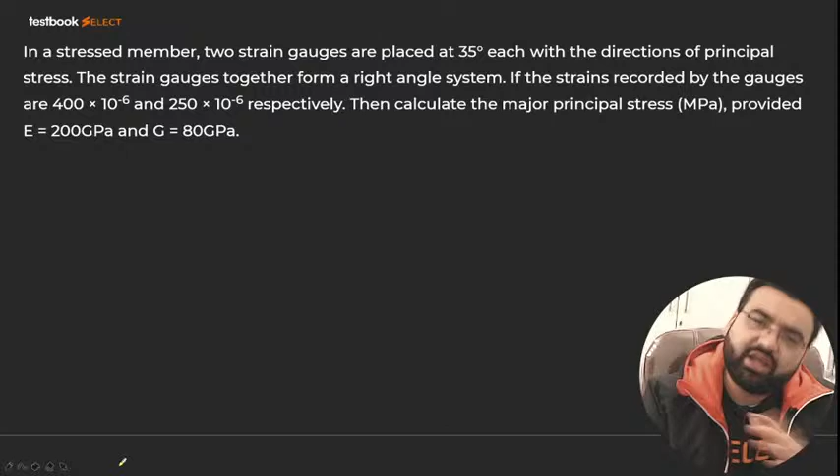This question you can solve. Again, it is a very lengthy question, right? इसमें क्या है? In a stressed member, two strain gauges are placed at 35 degree. Again, ये strain gauge का question है, बहुत ही lengthy question है. You can solve it. You can take a screenshot of it, and after some time you can solve it at your home. Or if you don't want to take the screenshot, आप YouTube पे back करना तो आपको question दिख जाएगा. You solve it, okay? You try to solve it.

This question also, this is also very lengthy question, लेकिन बहुत easy है. ये भी आपका question जो है easily solve हो जाएगा. This also you can solve very easily. Although it is a lengthy question, लेकिन आपका solve हो जाएगा.